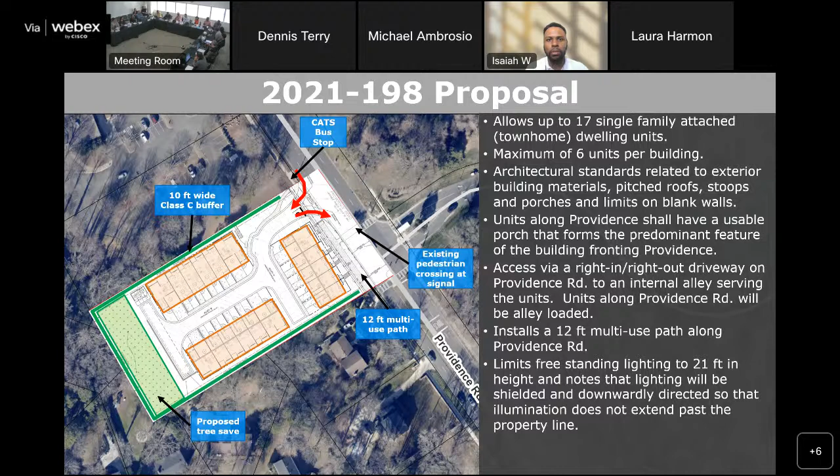Any other outstanding questions for the petitioner? I would like to address the videos of the stormwater because I heard that was a question. We can't let it do that. I would need it to be phrased from my panel, from my dais, so I'm afraid I'll have to let you down there, Dennis. Terry, did you have?

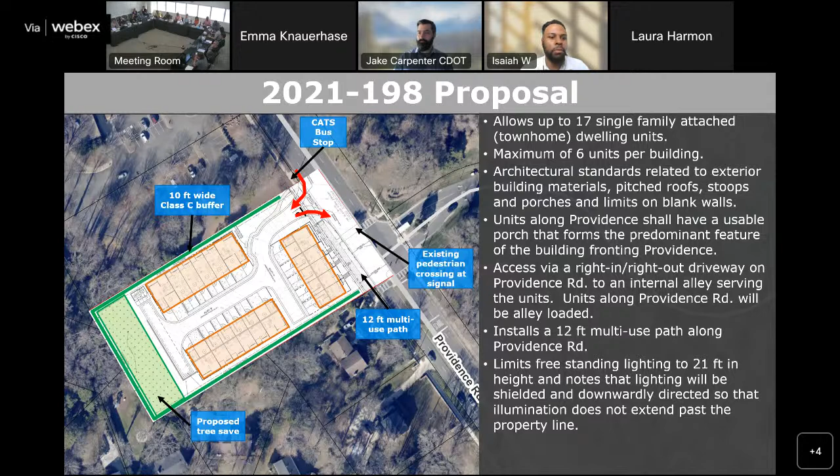Final transportation question, just to help solidify my position on concerns with this project: we don't have any roadway widths for Alley A and Alley B. Can you confirm what those widths are at this point, or is it still in design? There's a detail, not shown on the screen clip, but on the main site plan there is a detail that shows the alleyway with the dimensions, from the Charlotte Land Development Standards Manual.

Thanks for the confirmation, I appreciate that. That's all my questions.

Douglas: Thanks, Phil. I'd like to give thanks to Doug Losner at Charlotte Stormwater this morning, because I read the stormwater notes and they were a little jargon-heavy, and he helped me find my way back. Talking with him, my concern was the amount of stormwater and the incremental increase based on this project. In that conversation he gave me insight into the two notes John pointed out. It wasn't perfect, but it was better than what would be required as the base level, and I thought that was a good faith effort. I do sense the petitioner is willing to work and achieve something.

To Will's question, where does the water ultimately come out? There's not a good answer at that end, because there's not a system for it to tie into. I would again urge everybody to continue looking for solutions as we go forward, maybe somebody has a big pipe laying around somewhere, that sort of thing.

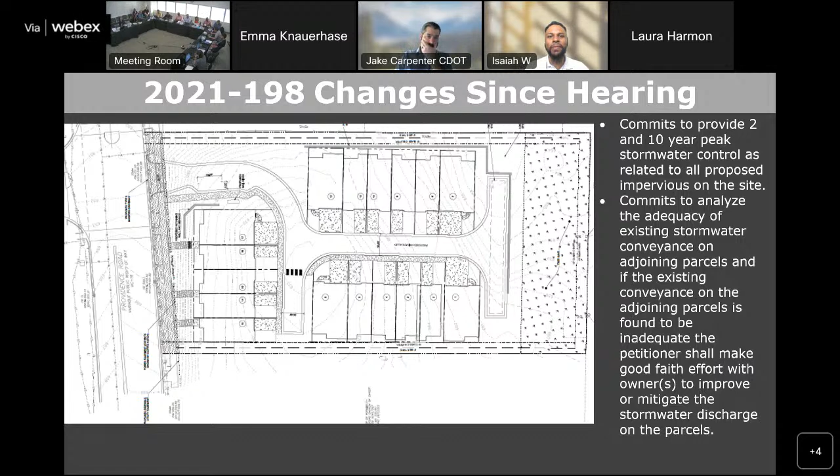One more question for John. You said this was inconsistent - is it by form or by policy? I guess it would be by form and policy, yes. Because I looked, it was all in one out there, and I thought I saw a maximum of 6 units. I assumed that was by form and inconsistency, but I'm just asking this question so I can get clear.

Maybe you don't know - I'm looking at Dave because it's both. Okay, right, just some clarity on that. And that transportation thing, Terry. Yeah, that. Thanks, that's all.

Anyone else have a question? Concerns?

Mr. Chair, if I may - go ahead. Follow up, just as a confirmation, because I'm trying to read through the notes here. We go from a 24-foot at the class 3 entrance down to a 16-foot private alley. Do we have a designation, forgive me if I can't find it quickly enough, for the fire apparatus access road? Is that considered, both of these alleys, a fire access road? Because I haven't been able to see that Alley A and Alley B will be 20 feet at minimum. I'm seeing 16 feet, so trying to clarify that.

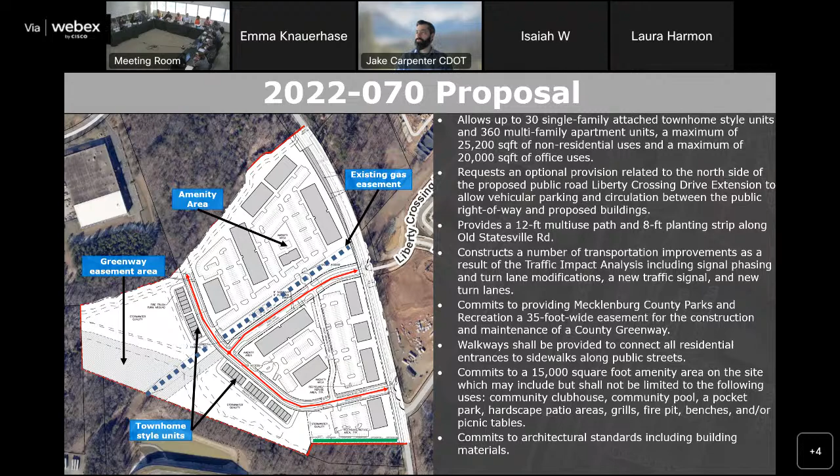All right. Anyone like to make a motion? I'll make a motion. Right ahead. Having reviewed the petition and considered the consistency statement prepared by staff to approve this petition, I move that we recommend approval of petition number 2022-070 as it appears before us, and the adoption of the consistency statement as it appears before us.

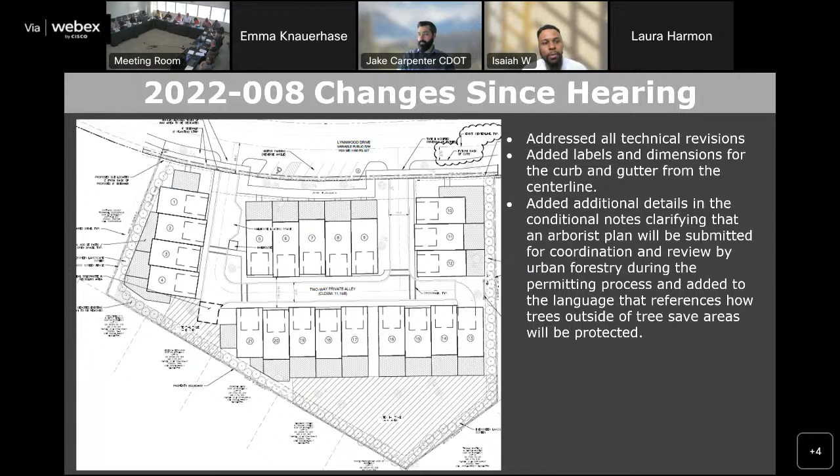They're also going to be slightly revising one of the stormwater notes. Currently it has that it would have 2 and 10-year peak controls for the site as it relates to all impervious surface. That's essentially to say that they're considering the site as in a natural undeveloped condition, so any and all impervious surface on the site will be under that 2 and 10-year peak control, rather than just the additional impervious surface being added through this rezoning request.

Staff recommends approval of this petition. Like I said, it is consistent with the policy map recommendation. They addressed a lot of the concerns we initially had. They held 2 community meetings, which was good to see, and there was significant community engagement. I've continued that engagement throughout the process and continue to hear from the opposition speaker you all probably saw at the public hearing. There's certainly been a lot of dialogue with this rezoning, which has been nice, but we've gotten it to a point that staff is comfortable and recommends approval. Happy to take any questions.

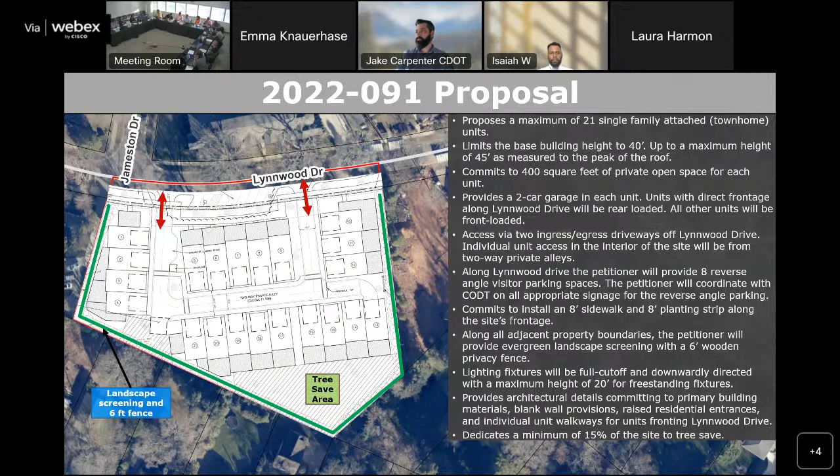Having reviewed the petition and considered the consistency statement prepared by staff to approve this petition, I move that we recommend approval of petition number 2022-091 as it appears before us, and adoption of the consistency statement as it appears before us.

Rhodes, second. Properly moved and seconded, moved by Welton, seconded by Rhodes. All in favor, say aye. Aye. And opposed? We are 5-2 on that one as well.

Terry, go ahead. I'm concerned with the details regarding the private street typical section design of less than 20 feet, and that's my main concern for this parcel, again, the private road design.

Anything to add, Russell? While understanding that we are getting improvement in stormwater, I think that we're adding way more impervious surface to this site than what was previously on it. So by nature, it's a downgrade, while I do like some of those.

Got that, Holly? Thank you very much. I'm moving on to item number 9, rezoning petition 2022-123 by Mungo Homes. Always fun to say. Michael, go ahead. Our threshold of fun is so low.

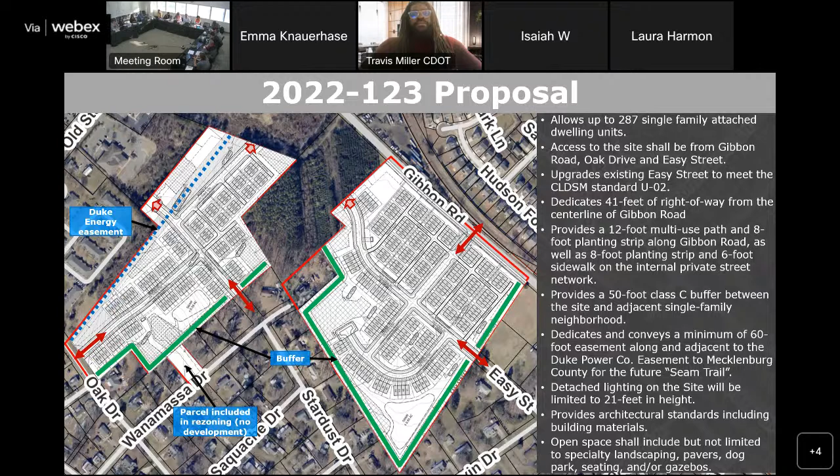Hoping to have a 7-person vote here. But we have - if you'd like, I can go get some tea and then when I get back we can have a 7-person vote. We will pause proceedings for just a moment.

This was reminiscent - a question for staff - the design on this was a little bit reminiscent of what's often referred to in our planning, in our cool ideas book, the cottage court style development with a central greenway where there's sidewalks and all of that. Is this another way of achieving that? I don't know from staff's perspective, and I don't know if anyone's looked at this, mostly Dave I think I'm talking to, who might have seen those presentations on what's coming in the UDO.

I think anytime you get those units facing common green space, it kind of gets you some elements of cottage court design, but it's not that to a T by any means. It's just an alternative to having everything either front a street or front something else, but it's something we're certainly seeing more frequently when they're facing common open space in between.

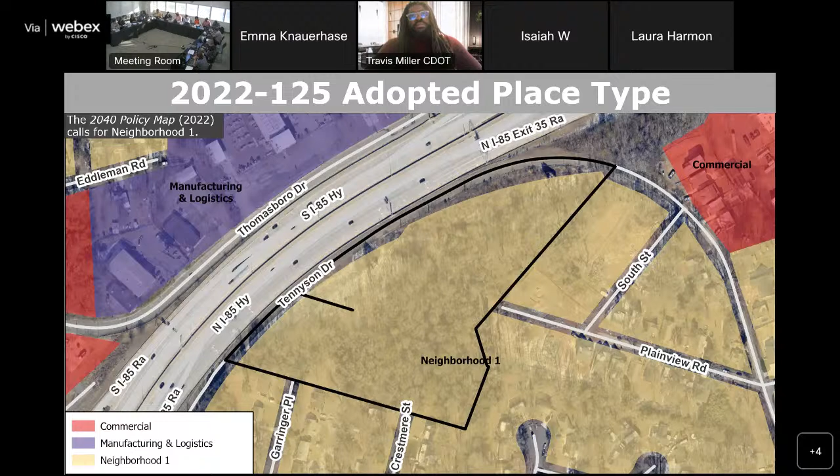Any other questions? I've got one, I just want to take the opportunity. Can you refresh all of us a little bit on the airport noise overlay impacts? We're in the process of authorizing and clearing the way for a 4th runway. We know that we've got the 5th busiest airport in the world. Could you just refresh us on that element? It's effectively just a disclosure to property owners or would-be property owners that they may have noise impacts. Thank you. Well, it's highlighting that people are notified. Yes, we're increasing residential area in this area, but at the same time, people should be making this decision based on the information they're given.

Any other questions? I'm going to ask another quick follow-up. Got another one? Might be for CDOT on this one.

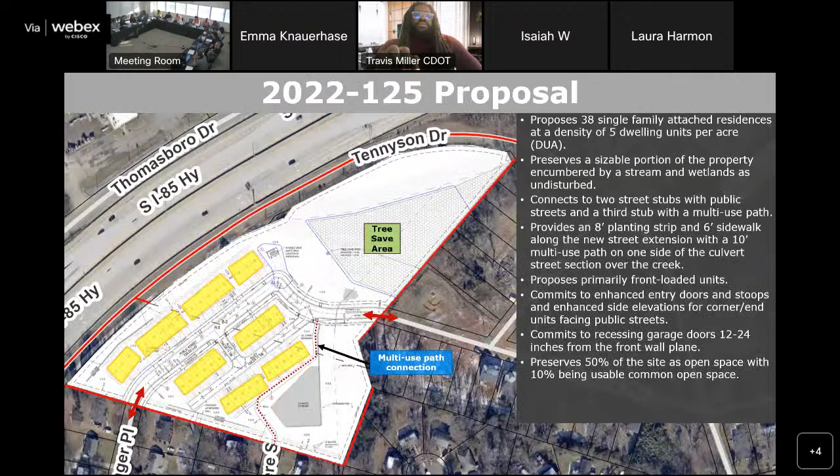We've got a sidewalk connection to a 10-foot multi-use path on a public street. Any conversation on sidewalks or crossings? It's an interesting dog leg on the alley there. I was curious, are we going to allow pedestrians to take their chances there? Any suggestions or comments on that from CDOT? If not, no worries. There were no comments on that.

It just provides for connectivity. You could place some bollards there to ensure safety for pedestrians, since it's a multi-use path, not just for walkers but bikers as well. It provides a direct route to other parts of this neighborhood, but that will be handled during permitting. Okay, thanks, we'll look for it there. Any other questions?

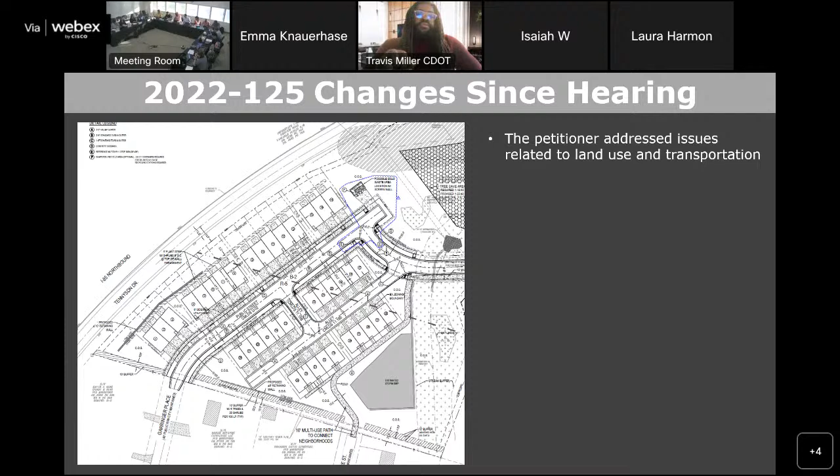Looking for a motion then. This is Lansdale. Having reviewed the petition and considered the consistency statement prepared by staff to approve this petition, I move we recommend the approval of petition number 2022-125 as it appears before us and the adoption of the consistency statement as it appears before us.

Welton, I'll second. Thank you. Properly moved by Lansdale, seconded by Welton. All in favor, say aye. Aye. And opposed? That passes 7-0.

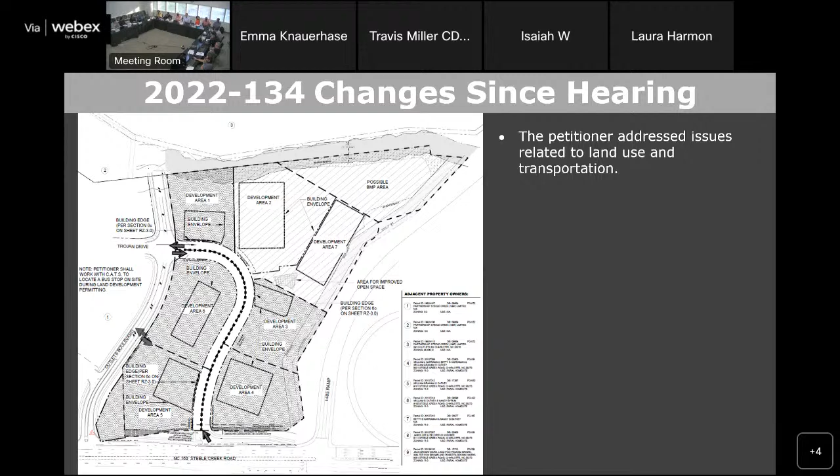Since the public hearing, the petitioner has addressed issues related to land use and transportation. There are still a few outstanding issues: revising the site plan to show proposed right-of-way 2 feet at the back of curb along Steele Creek Road, adding a conditional note to install curb and gutter along the Steele Creek frontage between Outlets Boulevard and Trojan Drive, and verifying stream buffers as well as tree save area. The petitioner is working with those departments to correct these outstanding issues, and we'd expect a revised plan to be submitted following the zoning committee. Staff finds it consistent with the 2040 policy map recommendation for the commercial place type, and staff does recommend approval upon resolution of those outstanding issues mentioned.

I'll take any questions. Any questions? Not so much a question, but Harvey, go right ahead.

I spoke to the Steele Creek folks down there. They were happy with the changes. They felt that they were engaged properly. And being that a lot of the area is mostly industrial, they support that. So thank you.

Good deal. Thank you, and Russell? Yeah, one question. It says here the closest gravity sewer main is approximately 750 feet south of the rezoning boundary. So how are we closing that gap? Is that still on the property or is that off the property at 750 feet? I understand that most of the site is built out, I'm not sure if that comment remains accurate, but the petitioner is here if you'd like to ask that question directly.

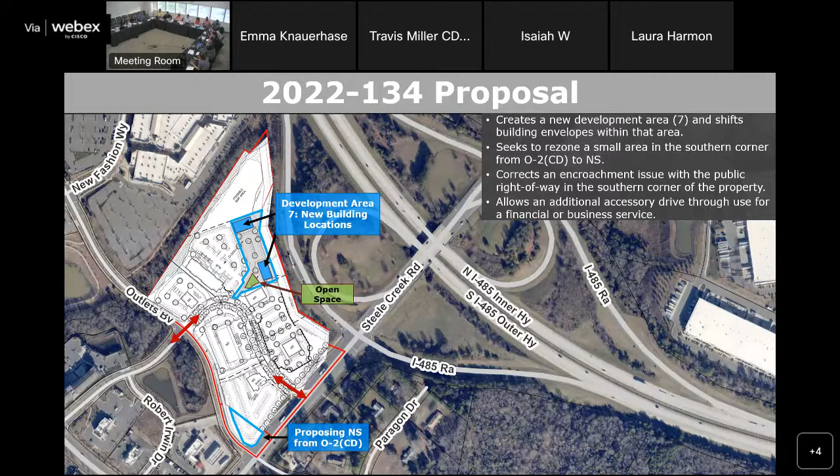Having reviewed the petition and considered the consistency statement prepared by staff to approve this petition, I move that we recommend approval of petition number 2022-134 as it appears before us, and adoption of the consistency statement as it appears before us.

Gaston, second. Properly moved by Rhodes, seconded by Gaston. All in favor, say aye. Opposed? That passes 7-0.

Moving on to number 12, rezoning petition 2022-137 by the Maintenance Team, Inc.

I recall this one. Joe, back to you. Busy tonight for you. Yeah, they're all lined up in a row, so it's all right.

This is approximately 10.26 acres located on Shopton Road between Steve Chapman Drive and Pinecrest Drive. Current zoning is primarily I-2CD, and a small portion there in the southwest corner, which is R3. It's within the airport noise overlay.

Proposed zoning is a site plan amendment for the portion that's already zoned I-2CD, and then I-2CD for the R3 portion, maintaining the airport noise overlay. The 2040 policy map calls for manufacturing and logistics for the site.

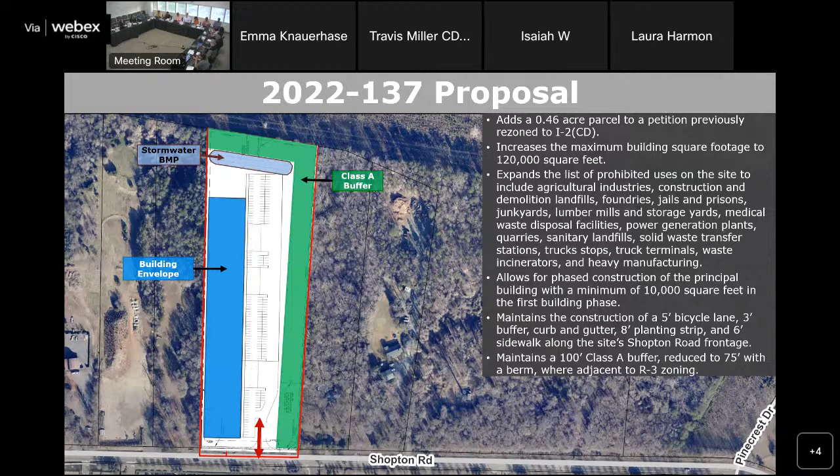Since the public hearing, the petitioner has addressed issues related to transportation and site and building design. There are no outstanding issues, and staff recommends approval, and I'll take any questions.

Thank you. Any questions? Does anyone want to suspend the rules so we can talk to Walter? Otherwise, we really wouldn't want to talk.

Motions? This is Commissioner Welton. I'll make a motion. Thank you.

Having reviewed the petition and considered the consistency statement prepared by staff to approve this petition, I move that we recommend approval of petition number 2022-137 as it appears before us and adoption of the consistency statement as it appears before us.

Harvey, second. Properly moved by Welton, seconded by Harvey. All in favor, say aye. Opposed? Passes 7-0. Moving on to number 13, item number 13, rezoning petition 2022-139 by Canvas Residential LLC.

Max, join the party. Glad to be here.

Petition 2022-139 is located at the northwest corner of William Ficklin Drive and Ben Craig Drive, west of Mallard Creek Road and east of W.T. Harris Boulevard. The site is approximately 6.94 acres in size and is currently undeveloped.

The current zoning is RE1 Research District, a conventional zoning district. The proposed zoning is UR2 CD, Urban Residential, a conditional district. The 2040 policy map recommends the campus place type for this site.

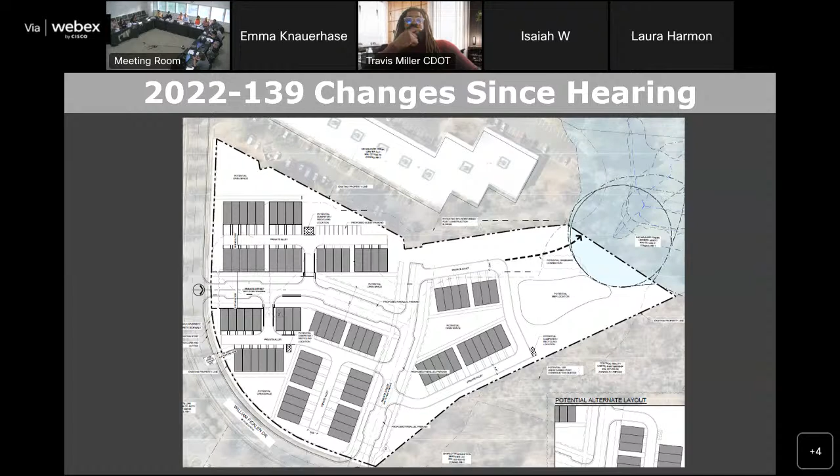The detail is included on the site plan. It's kind of small in the bottom right-hand corner, but it's a typical detail from the Charlotte Land Development Standards Manual, called the residential wide section. Okay, I feel like I'm in a loop now, so I'll stop.

I also believe we're having some difficulty with our internet on the iPads right now. We're having a hard time - we're not pulling up anything. All right, okay, just checking to make sure. We should feed the hamster before the meeting.

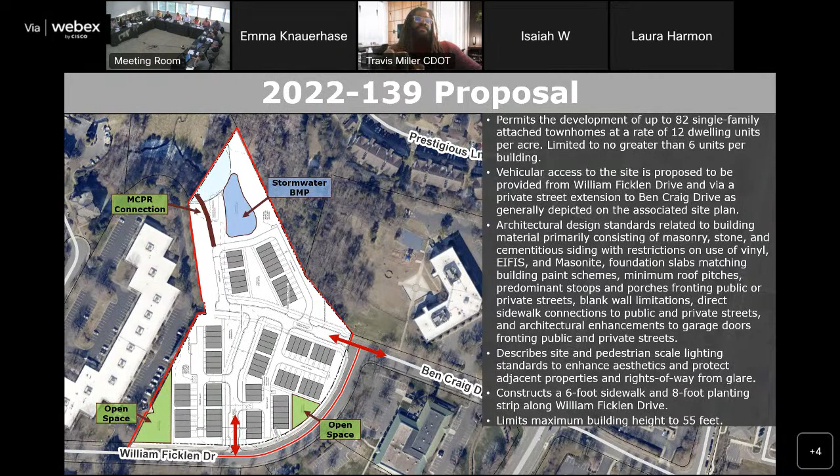Yeah, all right. Any other questions? I believe that was the next thing I was going to say. Any motions?

Commissioner Rhodes: I'll make a motion. Having reviewed the petition and considered the consistency statement prepared by staff to approve this petition, I move that we recommend approval of petition number 2022-139 as it appears before us and the adoption of the consistency statement as it appears before us.

Harvey seconds. Moved by Rhodes and seconded by Harvey. All in favor say aye. Opposed? No. Or 6-1.

Russell: All right, I really wish I had some deep and insightful thing to pull from the UDO for my opposition, but I think this was just a case of putting residential in the middle of an office park. You're dropping in residents and density with no regard for quality of life or amenities. I just don't like the placement of it. That's a personal opinion.

Thank you. Good deal. All right, moving on to item number 14, rezoning petition 2022-152 by Vinroy Reed. And we're with Emma. Good evening.

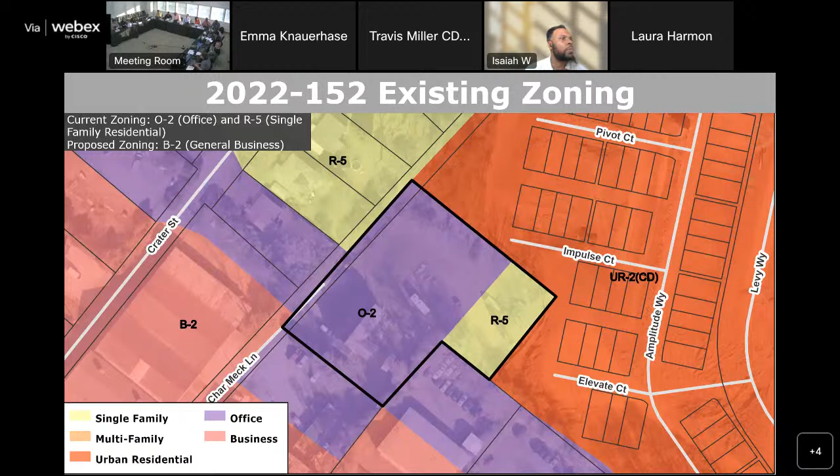2022-152 is a little under an acre, 0.87 acres, located on the southeast side of Char Meck Lane, north of Monroe Road and east of North Wendover Road. The subject site is denoted with a red star. It is an area developed with a mixture of multifamily residential homes, commercial businesses, and offices. The current zoning is O2 office and R5 single-family residential. The proposed zoning is B2 general business. The 2040 policy map calls for innovation mixed-use place type. This petition is inconsistent with the current place type.

Oh, neighborhood center, my bad. Staff does not recommend approval of the petition. This is a conventional rezoning, therefore there is no associated site plan and no outstanding issues with a site plan because we don't have one.

I would like to point out that the B2 district is autocentric and has potential uses that could be incompatible with the long-term goal of a neighborhood center. Additionally, a conditional B2 zoning request with limitations on auto-oriented uses and elements of design that promote the goals of the neighborhood center, or a conventional request to the neighborhood center zoning district under the UDO, could facilitate an outcome better aligned with the recommended neighborhood center place type.

If there are any questions, I can take them and do my best to answer them. Certainly, I'll go to my Russell, go right ahead.

Russell: Full of questions tonight. I want to get a bit more clarification on why staff does not recommend approval of this. It says you want a limitation on auto-oriented uses, but you're off of Monroe Road, which is a very high auto-intense use, as well as Wendover Road, and further north of that is highway 16. So I'm a little confused about why we'd want to limit auto uses on that site when we have such highly traveled auto intensive roads.

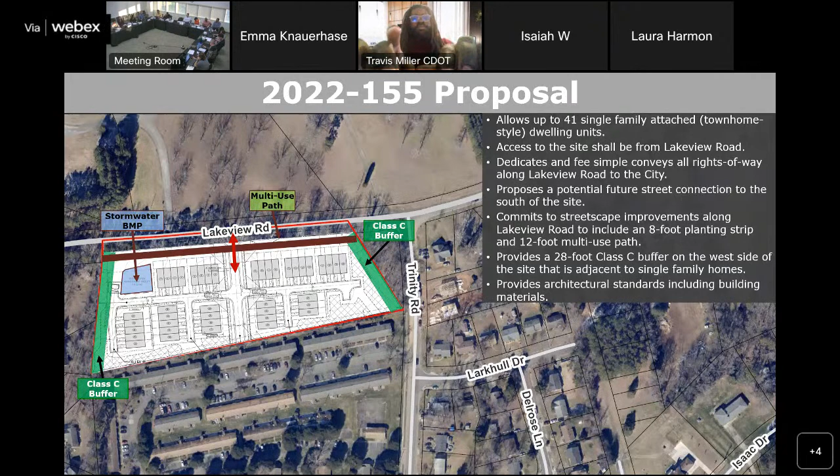Thank you. Anyone else? I'll ask Russell's question about the inconsistency. If you need me to restate it, I will, but be more than happy for staff to.

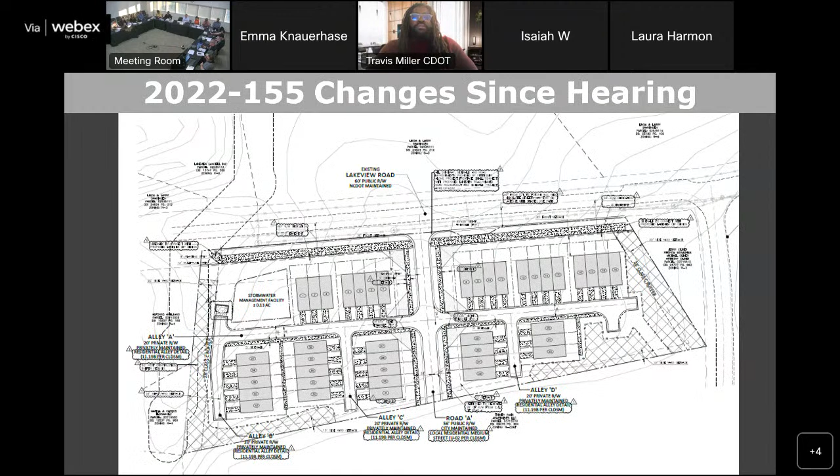Yeah, well, as you can see, if you go back a few slides to there. So the parcel to the south is neighborhood 2. It's currently zoned R22 MF. So this just brings that neighborhood 2 back up to Lakeview Road, Trinity Road. There's bus stop access on Trinity Road as well. So the density is 12 there. So we felt like it's a good transition, in the context of the surrounding neighborhood that it fits.

Thank you. Also, as I was researching this one, that weird triangle of land looks like it's just nothing, nobody's. Yeah, exactly. It would be very hard to fit a house on there. I'm just putting that out there. Eventually, we will be rezoning that, I imagine, so.

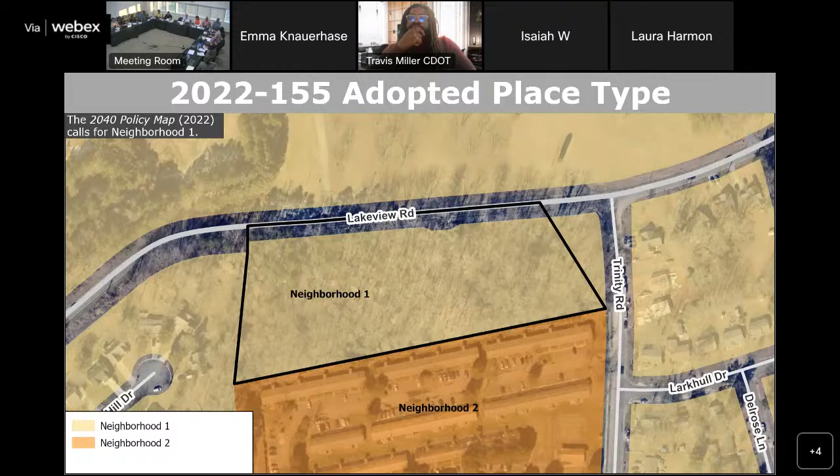All right, any other questions for staff? We can go ahead and do this one then, if anyone has a motion.

Commissioner Rhodes: I'll make a motion. Having reviewed the petition and considered the consistency statement prepared by staff to approve the petition, I move that we recommend approval of petition number 2022-155 as it appears before us and the adoption of the consistency statement as it appears before us. Gaston, second. Properly moved by Rhodes, seconded by Gaston. All in favor, say aye. Aye. Opposed? That is 6-0.

Passes. Moving on to item number 17. Rezoning petition 2022-158 by Fall Investments LLC. Emma, back to you. Busy night for you.

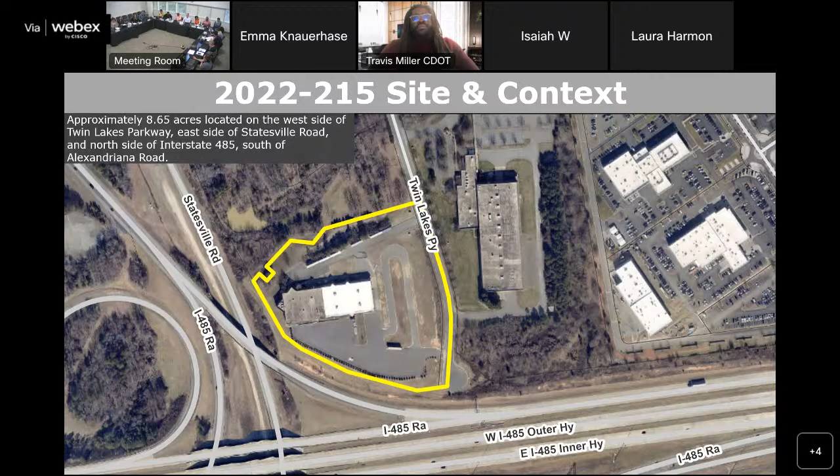Yes, thank you. This is approximately 8.65 acres located on the west side of Twin Lakes Parkway, east side of Statesville Road, and north side of Interstate 485, south of Alexandriana Road. The current zoning is BP Business Park. The proposed zoning is I1CD, Light Industrial Conditional. The 2040 policy map calls for manufacturing and logistics.

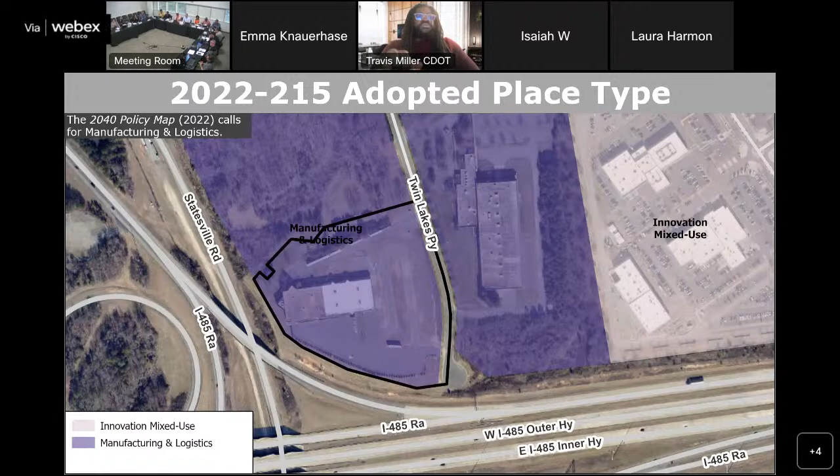On this proposal, it allows development of up to 65,000 square feet gross floor area of auto sales, auto repair, and office uses. They limit the total number of principal buildings to a maximum of 3 buildings. Allows for the existing building on the site to remain, be expanded, and/or new buildings may be constructed on the site. They are providing an 8-foot planting strip and a 6-foot sidewalk along the site's frontage on Twin Lakes Parkway.

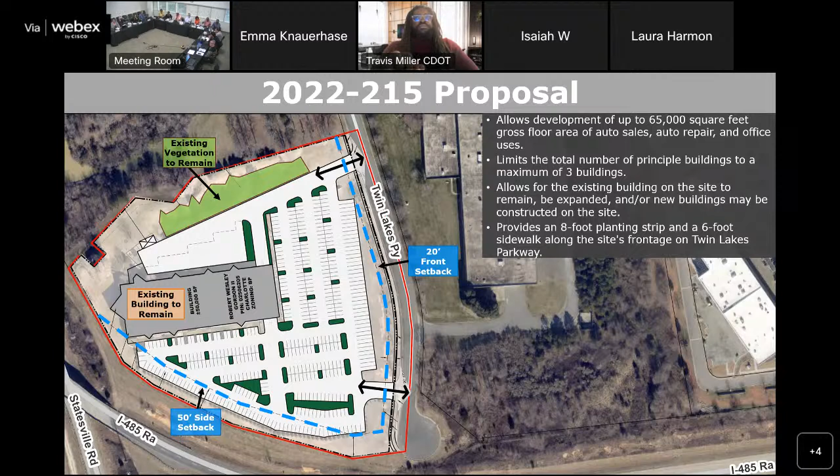No changes since the public hearing. The petition is consistent with the 2040 policy map recommendation for manufacturing and logistics. There were no outstanding issues, and staff recommends approval of this petition. Be glad to take any questions. Any questions? Anybody want to ask Michael anything? Anyone? No? Motions?

Commissioner Rhodes: I'll make a motion. Having reviewed the petition and considered the consistency statement prepared by staff to approve this petition, I move that we recommend approval of petition number 2022-215 as it appears before us, and the adoption of the consistency statement as it appears before us. Harvey, second. Properly moved by Rhodes, seconded by Harvey. All in favor, say aye. Aye. Opposed? That passes 7-0.

Excellent, thank you guys. Finally eking this one out under 2 hours. Do we have anything else? I know usually Dave, if he has something that he wants to make sure we address, he says it. Does anyone on staff know? All right, did you guys go and make them all consistent just to keep me quiet tonight? Thank you.